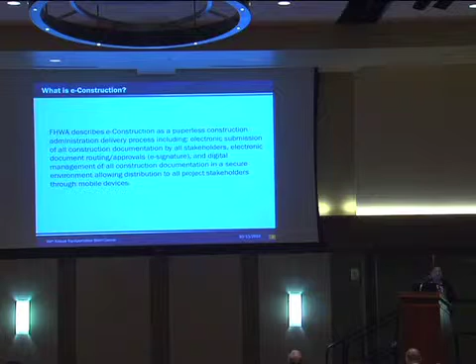So basically, it's a paperless construction administration delivery system. So what does that mean? Basically, they just want you to do everything paperless. Sign everything paperless, give me electronic documents.

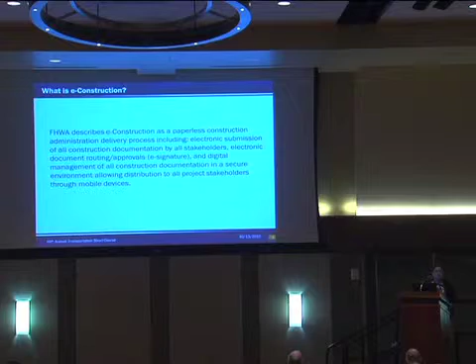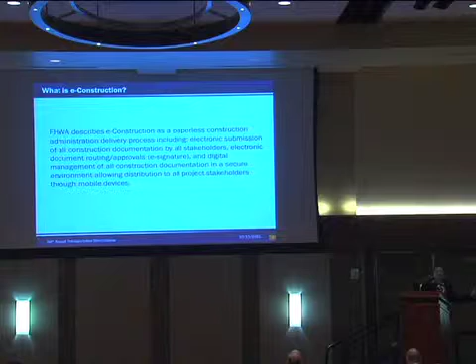At TxDOT, more and more of us are getting accustomed to doing that, sending things by email. But I think where we fail to really grasp the idea is I still see a lot of offices scanning documents to rename them and file them somewhere. That is really anti-e-construction, okay?

Don't get it by paper and then scan it. I see people spend a lot of time doing that. Get your contractors more accustomed to just giving it to you electronically.

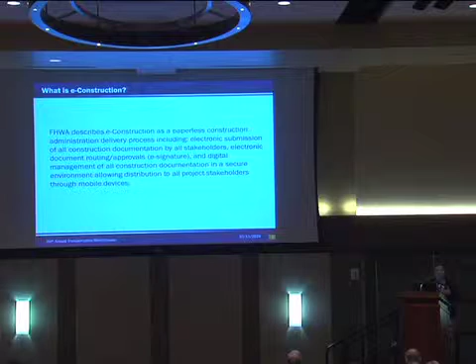Everything, okay? Today, what I'm going to talk about, there's 5 things you should be doing. It's kind of at the end of the presentation, but I want to let you know that if you go away just learning those 5 things, you'll be doing a lot more than your neighbor already does.

So what does FHWA say about e-construction? They say the paper-based system requires a significant amount of time and money to create the process and store documentation. In this era of instant communication, on-the-fly information access, and tech-savvy workforces, the state of affairs is fast becoming obsolete. I'll tell you the biggest complaint from other DOTs.

We're storing all these documents and we pay for that storage. That's the biggest thing they talk about: what do I do with all these documents? Where do I store them? A lot of people say, oh, let's put them in the cloud. Great, now I have 2 copies, 3 copies, 4 copies. And that's what you see all these DOTs talking about: all this documentation.

If they got it electronically, that's where it goes. If they've got it in paper systems, they have warehouses and warehouses and boxes and boxes of construction documents. Again, we're trying to get rid of all of that. All of it, maybe not. Minimize it, that's what FHWA is looking for.

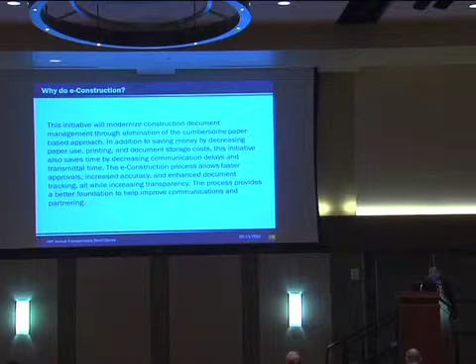So the initiative will modernize construction documentation management through the elimination of the cumbersome paper-based approach. In addition to saving money by decreasing paper use, printing, and storing these documents, this initiative also saves time by decreasing communication delays and transmittal time.

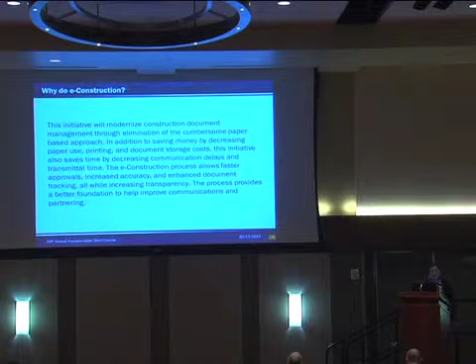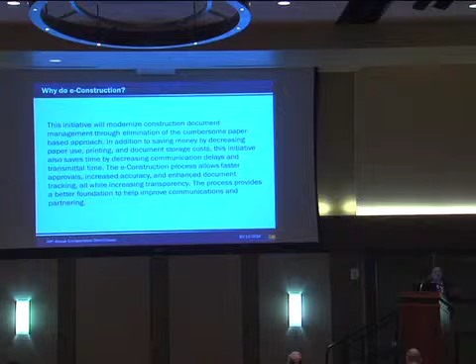The e-construction process allows for faster approvals, increased accuracy, and enhanced document tracking, all while increasing transparency. The process provides a better foundation to help improve communications and partnering, right? So their belief is that if we do more electronic communicating, our documents get faster, better, more reliable.

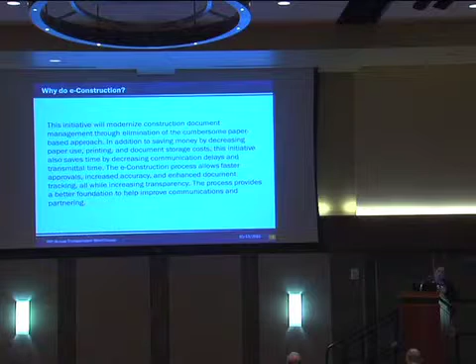And I'm kind of in that boat with them too. I think it's faster for sure. What I see us doing is collecting more and more documents now. Now there's all kinds of things I can collect instead of yesterday I could only collect these 10 pieces of paper.

So FHWA likes to track us on 2 different scales, all right? E-construction, who's doing it in the United States? Well, in the little chart up here, Texas is in the yellow. We're one of the national leaders. I'll tell you, when we first started doing this a couple years ago, it didn't surprise me, right? I mean, we're Texas, we're ahead of everybody. But what surprised me was how far ahead we were just based on what we do.

So let me give you an example. E-construction is about automating things, right? What did we automate many, many years ago? We got site manager in construction. That was about probably 14, 15 years ago, right? It's old to us now.

Let me tell you, half of these states, they don't even use it. So that's new to them. We do electronic bidding. That's pretty old too at this point. That's new to other people.

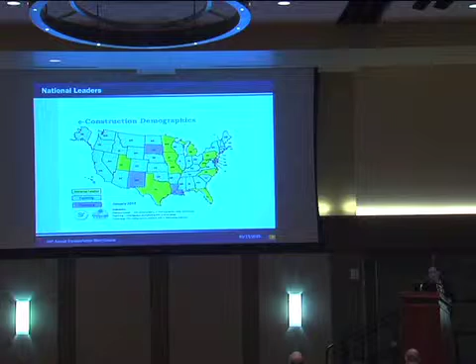Okay, so we happen to have all those things that FHWA thought was conducive of e-construction. They said these are the things you need to have to be able to make things flow well. So we're on their map as far as national leaders in that. We're also on their map for 3D design and plans, right? So that's another initiative, not just paperless system. They love 3D design.

I mean, they just love it. Renee's been really great at getting that implemented in TxDOT and having districts work on it. And if you've ever seen those plan sets, they're just really neat.

So again, we're national leaders. I can tell you that there are a lot of states not even looking to go that direction, but FHWA is giving a lot of money in that direction. So next year, I'm sure some people will take advantage of that.

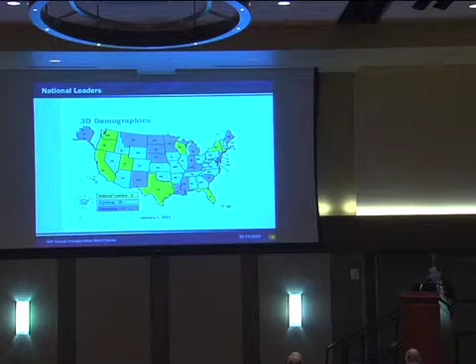So what do we do at Texas? Well, in design, right now, as one of the new things, we use ProjectWise. Most districts should have it by now, and those that don't, I think it was like the Northeast districts, or maybe, and one metro district.

ProjectWise is big. Lots of DOTs use it. It's in design right now. I think what you'll see in a little while, we'll talk about getting that into construction and maintenance. But as you get it flowing through all your sections in your office, in the area office, from the beginning to end, now you have one place where you have all your documentation. It's actually a pretty cool thing, to be honest, to get everything in one area.

3D modeling, again, design has also pushed for that. In letting, I know most people don't think about letting and what goes on there, but I think last time I counted, we issued something like 12,000 proposals a year. That's at least 1,000 a month. That's just proposals in paper.

What if we delivered those electronically? Well, I'll tell you we do. We do many of them that way. Our bids the same way. And if you have 5 to 6 bidders on every job and we let 1,200 jobs, you know how much paper that is? It's a lot.

So now we have the electronic bidding system, and what you'll see is we're upgrading that right now. I didn't include it in the presentation because that's kind of on the contractor side, but you might see it too, that they're upgrading that portion. We're upgrading the place where we put question and answers for pre-bid question and answers. We're posting those out on the website. I think Senate Bill 20 is going to require us to put executed contracts out on the website. That all kind of happens at that letting level.

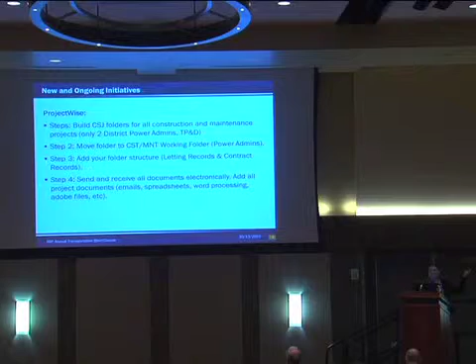All right, so I'm going to talk about those 5 things. Number 1, ProjectWise. If you're not using it, use it. Everybody looks at me and they go like, what? Okay, so let me tell you how construction's going to use it.

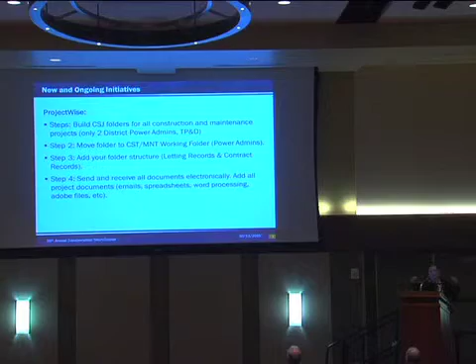Take what the designers have, throw it all out the window. Okay, we're not going to do what they're doing. What they are going to do for us is this: they're going to build somewhere in, right when they cut a CSJ, they should build a folder in ProjectWise with the CSJ.

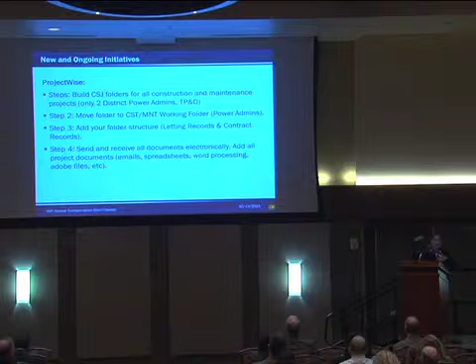There's only 2 district power admins. One of those people is going to build you a folder. It's going to have the CSJ on it. They're going to start inputting everything they want into there, the design files, the environmental documents, the AFAs, cross-sections, whatever they're doing, they're going to put it there.

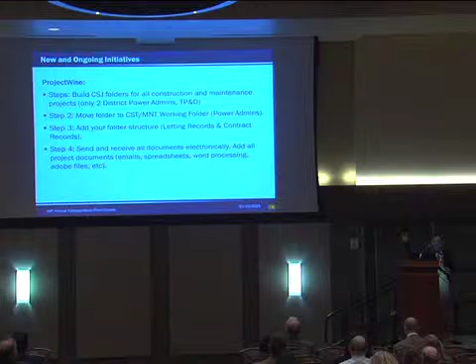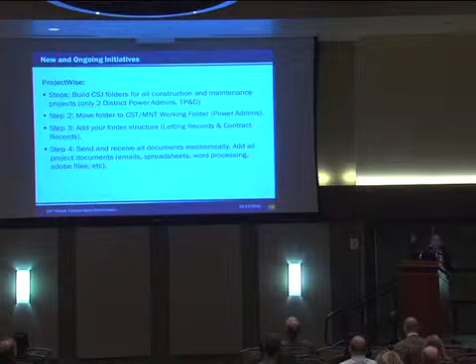When they're done with it and it goes to letting, somewhere around letting time, they should move that folder over to another little area that says either CST working folder or it's maintenance working folder. It's only one of those 2. That's where you'll find it. After it gets there, that's your opportunity to start dropping your files.

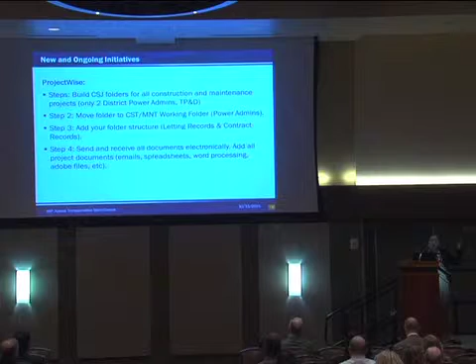So let me tell you how easy this works. Right now, probably everybody who's got electronic documents has it in the T drive in a folder structure.

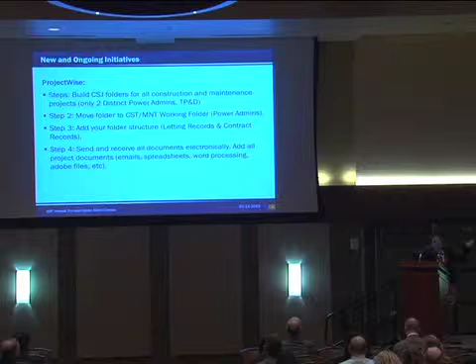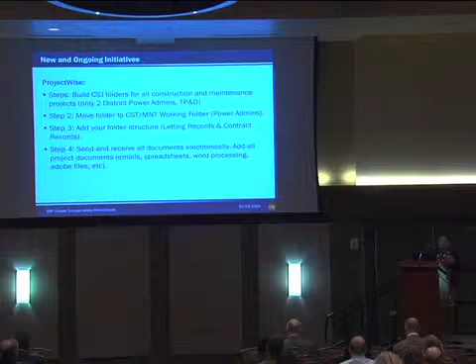Let's say you have 10 folders. You take that folder structure, and I'm not kidding, you right-click, copy or cut, and paste, and it goes right into ProjectWise—about that fast. Now, if you have a lot of documents, like you want to put a job that's already established in there, that might take some time. But if it's new and you're just dumping the folder structure in there, it'll take a whole second.

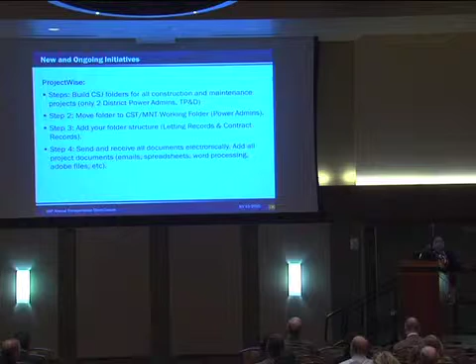Once you have the folder structure in there, anybody can add documents. Once they're in there, they're in there—you're not deleting them, so be careful what you put in there. What do you put in there? Anything you want: emails, spreadsheets, Word documents, Adobe files, your schedules. You can put almost anything in there.

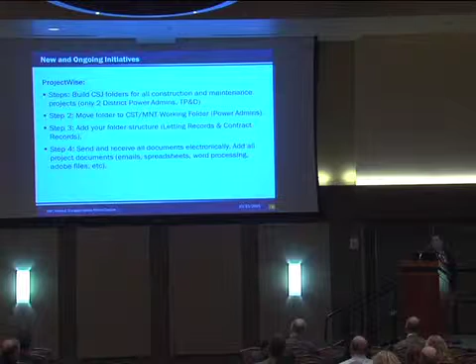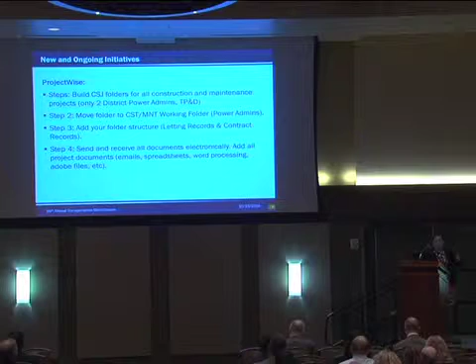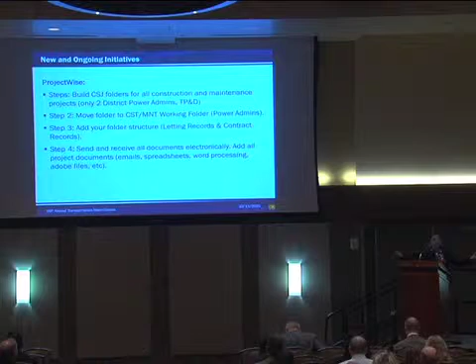Now, ProjectWise resides outside of our systems, right? Outside of our firewall. So anywhere you're at, you can log on to ProjectWise, anywhere. On your iPhone right now, you can log on to it if you have an account and look at any project in there. When I say that, I mean you have access to the whole state of Texas and all their documents—look at any job you want.

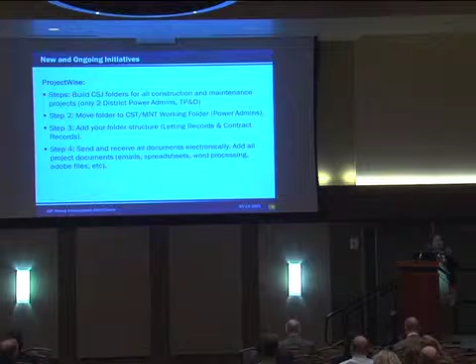You can put things in there—well, you can put things in your folder. You'll have permissions to do that. You won't have permissions to put things in other people's folders. You'll never have permission to write over other people's information, just yours.

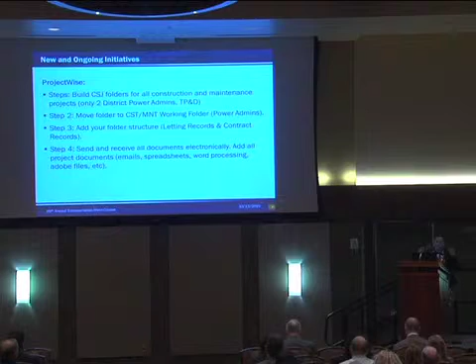Kind of—these are set up like user groups, all right? There's a construction user group, a maintenance user group, a design user group. Once you learn all those, where you land in the user groups, you'll know what to put in and what not to put in and where to put it, right?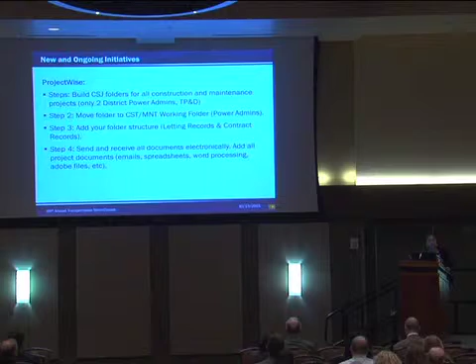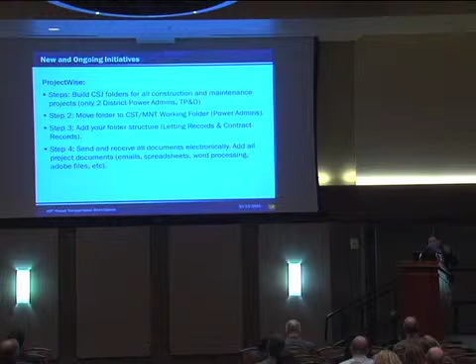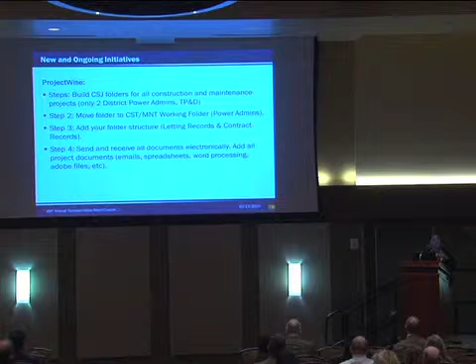But the good part is for construction folks and maintenance folks, you build your own folder structure until they tell us not to, right? But for now, build your own. And the reason I think we get to build our own and design didn't is because designers are sharing documents, so they need to know where to find other documents. Once it gets to our area, we're not really sharing documents—it's just a place for us to store things. So that makes it a lot easier for us; we don't have to have a real rigid folder structure.

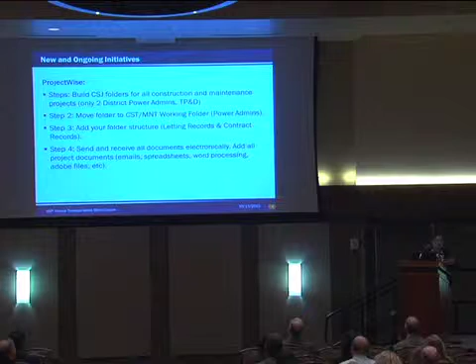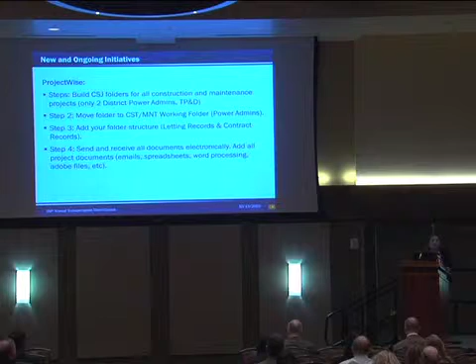So again, if you get a lot of emails that say you've got too much on the T drive, you can start moving it here. If you want to just start by saying, hey, every project I let this month, start there. However you want to start moving, that's fine—just get moving.

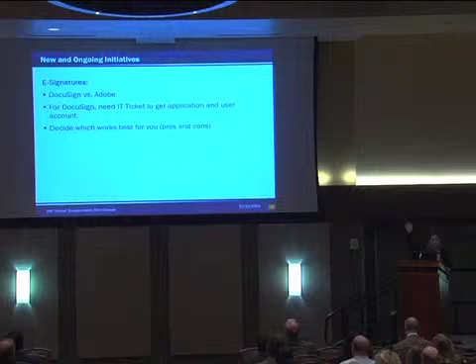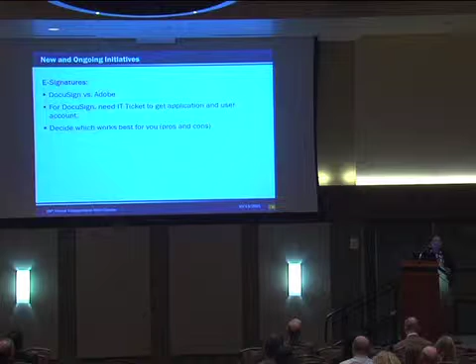All right, e-signatures. If you're not using e-signatures, you're behind the times. Okay, our administration's already using e-signatures, and you know how long it takes for them to start using things. So what do you have at your fingertips? You've got DocuSign, you've got Adobe. How many people use the Adobe signatures? That's not enough. Let me tell you, it'll take you, let's just say 30 minutes to set it up—30 minutes to set up an e-signature. After that, it'll take you 2 seconds to actually use it every time.

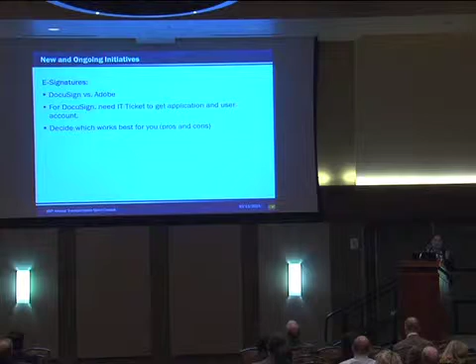It is so simple. Let's talk about some of the pros and cons, though. Using Adobe, if I sent you a letter, let's say it's a work start letter, and it has my signature at the bottom, I can sign it. I can have multiple people sign it. I can lock the document and no one else can sign it after me. Works just fine, right? I could email it around to my group or put it in a folder in the T drive and everybody can get to it. Works great for internal stuff, when there's one signature or two signatures maybe.

When do you use DocuSign? DocuSign is an external application. You got to have an IT ticket to get you access. But what you do is you upload your document, and if there's a template already created, it'll show you where the signature lines are. But if there is no template created, you'll have to put these little tabs that say this is where the signature goes. And then you forward it by email address to the people who need to sign it. DocuSign is great for people who do not reside within TxDOT because I can send it out to 5, 6, 7, 10 people.

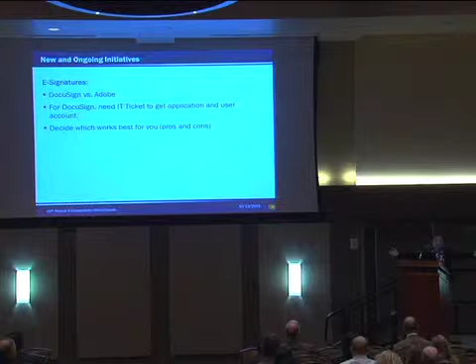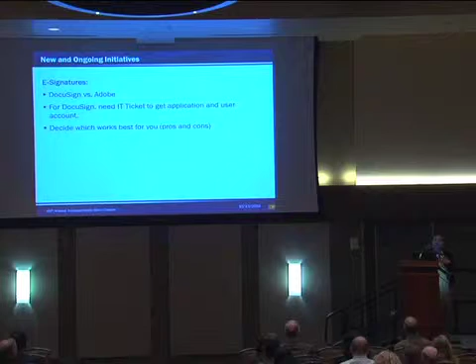They can all sign it, and then that document comes back to me compiled in one document with all the signatures. I don't have to float it around, I don't have to email it around, I don't have to put it in the mail. So if I was having to execute something with somebody who didn't work for TxDOT, that's the route I'd probably use. The good thing about DocuSign too is it tracks who gets the document.

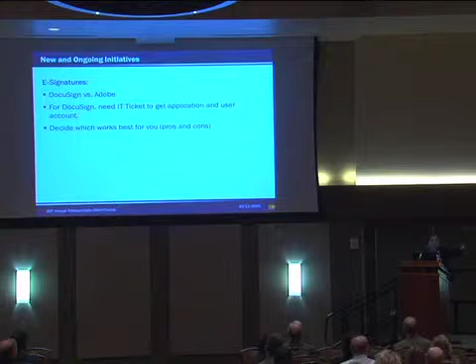It tracks who gets the document, when they opened it, how long it's been there. I can put an expiration on it. If I only want them to have 10 days to sign it, it'll expire in 10 days and they won't be able to touch it after that. So there's some added functionality in DocuSign, but the downside is it's not as fast as Adobe.

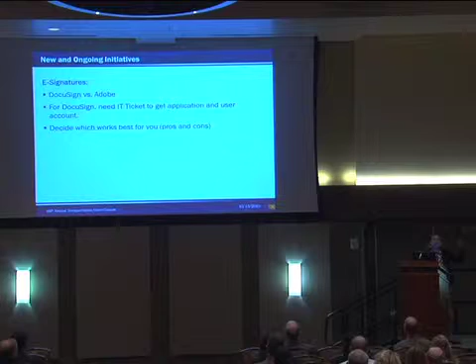If I had just one piece of paper in Adobe, I would email it over. DocuSign, I've got to upload it, have everybody sign it, and download it, right? You've got to know which one you want. So for contract execution, work orders, use DocuSign. Change orders, Adobe. Letters, Adobe. It's pretty simple. Each one of them makes it really easy to sign.

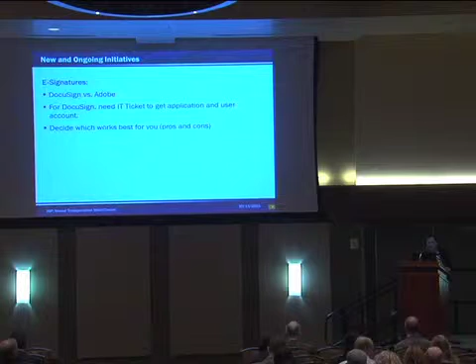What else? Anybody have questions about e-signatures? All right, they're going to kick me out in a minute.

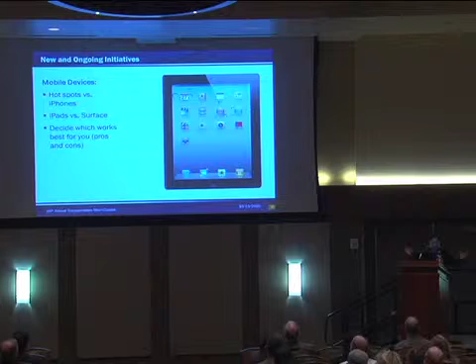Mobile devices. Everybody's still talking about mobile devices. Basically what I get from the IT folks is you can order whatever you want. Here's the kicker: they do not support all devices, right? We know how to do iPads, that's why we're choosing iPads right now. But if you get a Surface Pro or something else, you better know how to support yourself, okay?

Hotspots or iPhones, there's no ups or downs there. A hotspot, you can have 5 people log on where you're at. An iPhone is mostly only for you, unless you made it the hotspot for other people. I wouldn't pay for both of them. I know people who are paying double rates right now. Pick one that works in your area.

Again, iPads or Surfaces, there are some pros and cons. iPads have apps that work real great. Excel's not one of them, Microsoft Office isn't one of them. You can open it, it just doesn't work great, right? What about the Surface Pro? Well, I can open Excel and Office, but it's bigger. There's no carrying cases. It's got its issues too, okay?

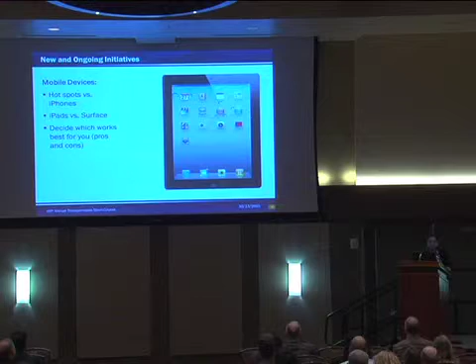Again, IT's not going to tell you which one to buy. You're going to buy it yourself, but you better be comfortable with it.

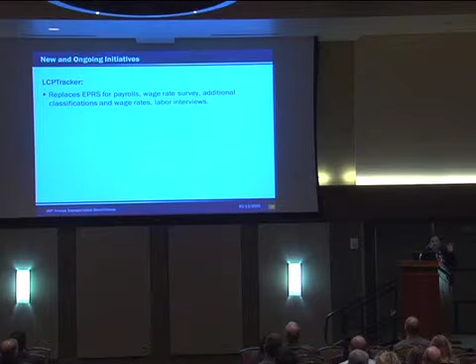This might be the last one, LCP Tracker. So we bought LCP Tracker in the construction division. It's not rolled out quite yet, but it will replace EPRS for payrolls. It works really, really great. It only allows contractors to upload payrolls that are compliant. So once they're uploaded, there's very little checking these days. It almost does 100% check, whereas right now our requirement's 10%.

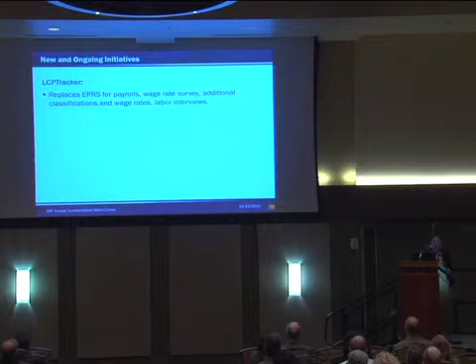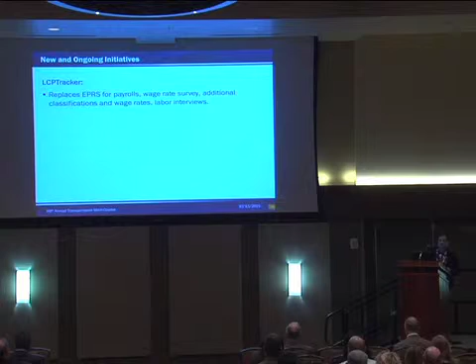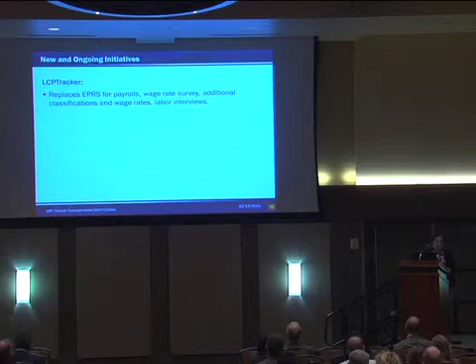You can also upload things like additional classification and wage rates, your labor interviews. Everything can be stored out there, which is really great on the web. And that's probably what we'll do the next survey from. The construction division is just starting that initiative, so give it a month or 2 or 3, and you should start seeing it. I think they're actually going to roll it out to AGC to let them see what the framework is. We're going to tweak it a little bit for our needs, but if anybody wants to start using it now, contact the construction division, and I bet we'd let you be our pilot districts.

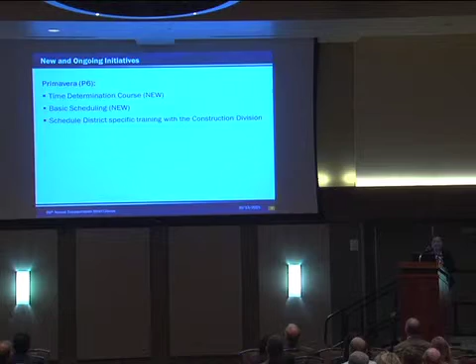Okay, I do have one more, P6. Bob's going to talk a lot about Primavera in a minute, so I'm not even going to cover this one very much. What I'm going to tell you is, if you're not using it, you should. There are more than enough licenses. The courses have been rewritten.

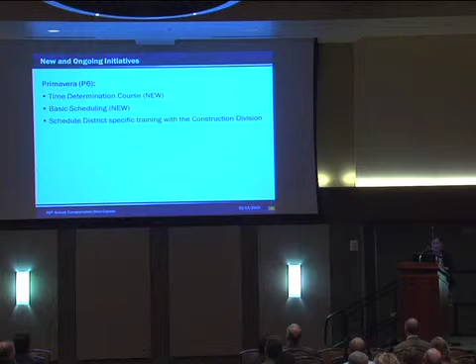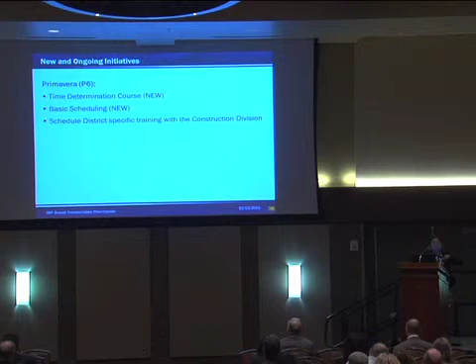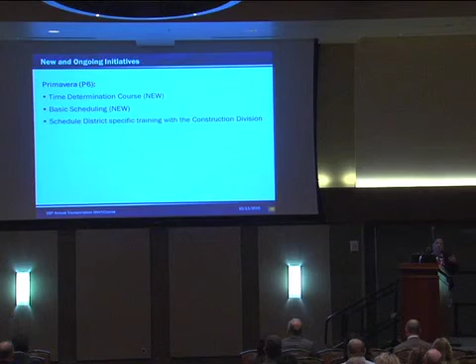I'm going to tell you this one for contract time determination. The time determination course is what they called it, but it's actually very good for construction folks to get you accustomed to working with Primavera, and how to build schedules. The next course is basic scheduling, which gets you into more of the layouts, the printing, and the analyzing. It's not an in-depth course, but if you have new people looking at Primavera, these are the ones you should take. You would schedule district-specific training with the construction division, okay?